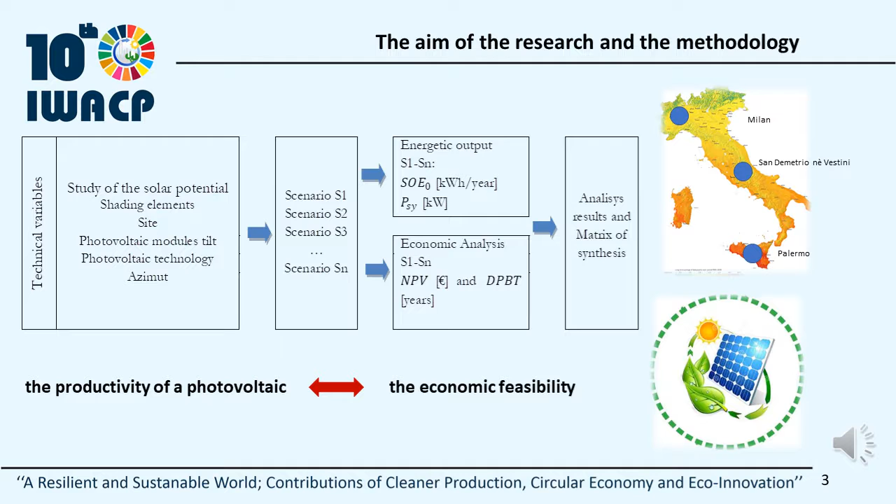To this end, the researcher has developed a methodology tested on a case study which is based on technical and economic criteria. To analyze the productivity of the photovoltaic system, all the main input factors that can affect the technical and economic performance of the system were investigated: in particular, solar potential analysis, individuation of shading elements, place of installation, azimuth, tilt of photovoltaic modules, and photovoltaic technologies. For the economic valuations, the discounted cash flow method was used; in particular, the two indicators of net present value and discounted payback period were estimated.

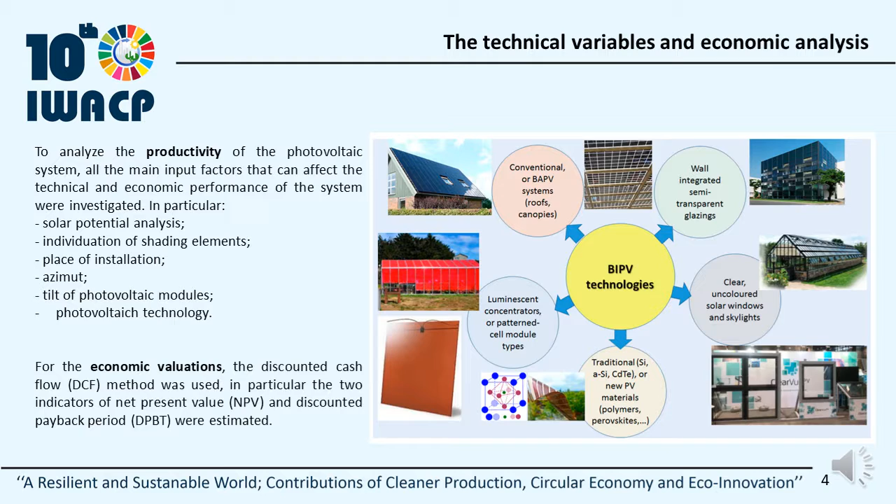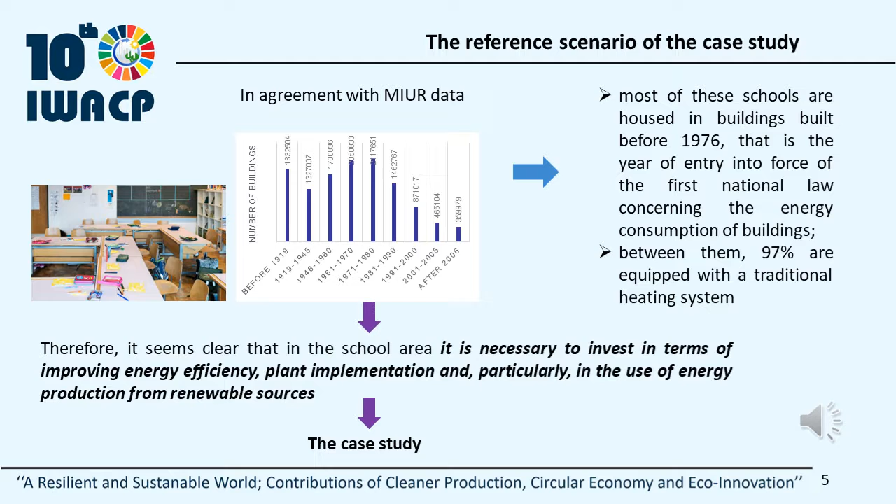The reference scenario of the case study is that of the school because, according to MIUR data, most schools are housed in buildings built before 1976, the year of entry into force of the first national law concerning the energy consumption of buildings. Among them, 97% are equipped with a traditional heating system. Therefore, it seems clear that in the school area it is necessary to invest in improving energy efficiency, plant implementation, and particularly in the use of energy production from renewable sources.

The San Demetrio ne' Vestini Comprehensive Institute is located in the municipality of San Demetrio ne' Vestini in the province of L'Aquila and includes kindergarten, primary and secondary school. The latter is housed in an isolated building organized according to an L-shaped floor plan. It is spread over 3 floors which are completely above ground thanks to the presence of the steep terrain in the south elevation and partially underground in the north elevation.

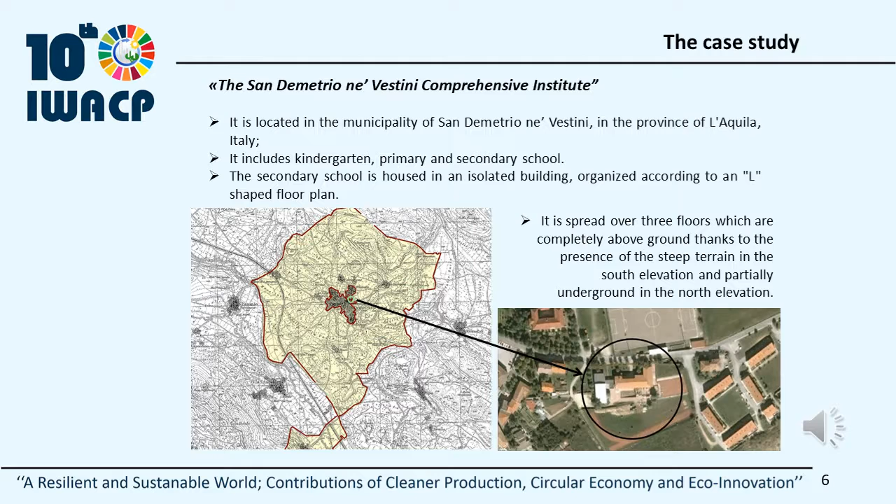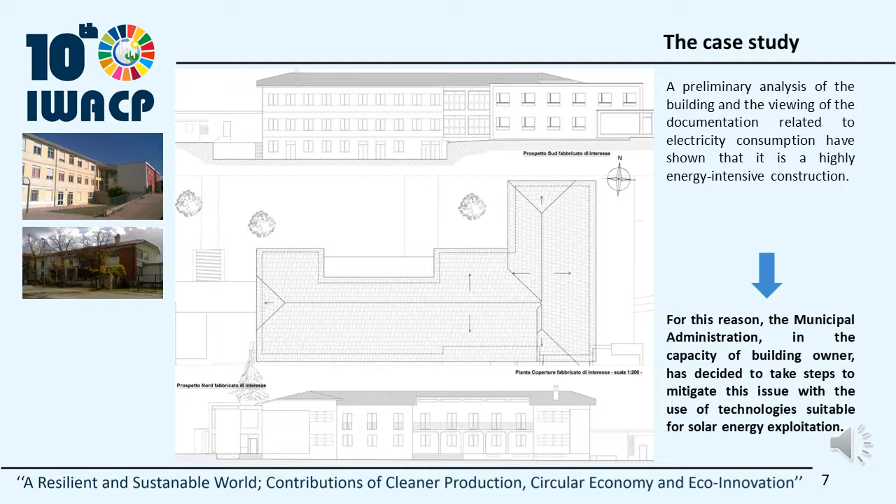The preliminary analysis of the building and the viewing of the documentation related to electricity consumption have shown that it is a highly energy-intensive construction. For this reason, the municipal administration, in the capacity of building owner, has decided to take steps to mitigate this issue with the use of technologies suitable for solar energy exploitation.

Related to the input data, the PV system was defined as a function of geographical position of the plant: north, central, and south of Italy; plant technology used: monocrystalline, polycrystalline, and thin film; roof inclination: 15 degrees, 30 degrees, 45 degrees. Considering all the possible combinations of these parameters, it was possible to obtain 27 different scenarios, obtaining a wide range of solutions to evaluate the variation of the photovoltaic producibility for the most commonly used technologies.

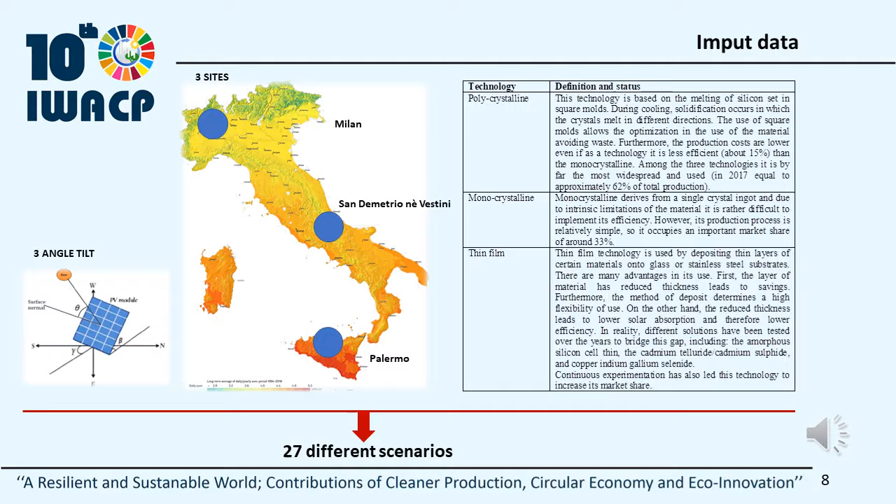The results obtained show how the profitability of the PV system is verified in 21 out of 27 cases. The greatest profitability is obtained in the case of southern Italy, with a monocrystalline technology and an inclination angle of 30 degrees. Furthermore, any case study located in southern Italy has greater profitability than the respective case studies located in northern and central Italy. This is because the PV plant located in southern Italy has greater efficiency and therefore greater system output energy.

However, even in the case study located in southern Italy with thin film technology, the profitability of the plant is not high and the negative cash flows are repaid by positive cash flows at the end of the life of the plant, 20 years. For the other case studies located in northern and central Italy with the thin film technology, the PV plant will give an economic loss. For the remaining technologies, the value of the NPV is always greater than zero. They are therefore profitable investments.

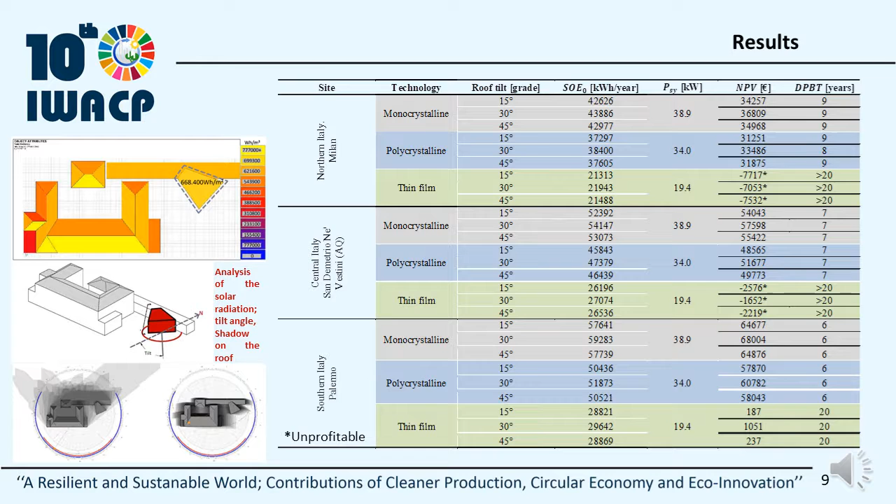This is also confirmed by the DPBT index. In fact, the time required to recover the investment is a maximum of 9 years. However, leaving only the technology to vary, monocrystalline technology leads to greater economic profitability despite having a higher investment cost. Finally, with the same technology used and the location of the system, an inclination angle of 30 degrees allows greater economic profitability. This is due exclusively to technical choices that allow the plant output to be maximized. We also made a comparison without FER 1, and we have seen that in most cases the investment is not profitable.

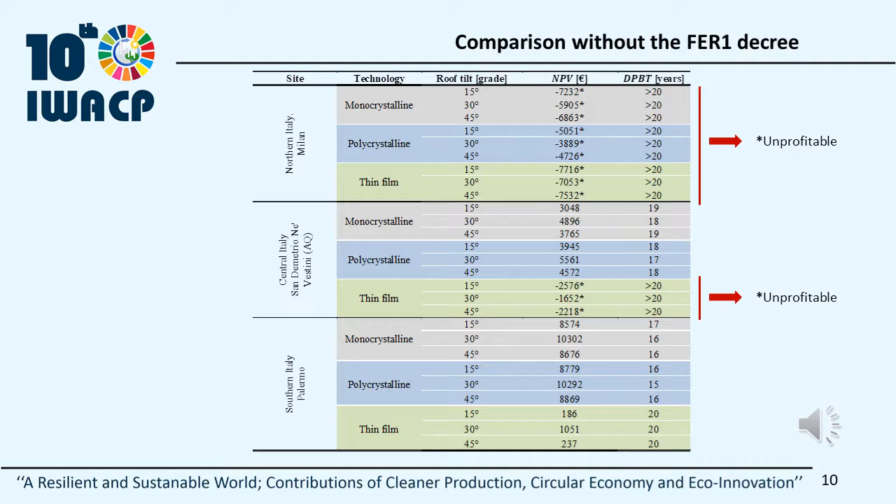So we can conclude that the research illustrated has shown that the FER 1 decree is suitable for encouraging photovoltaics, especially in the southern regions. It would be desirable that in the northern regions it was more used to encourage other technologies. The methodology developed could be used to optimize the process of exploiting renewable energy for better energy performance. The methodology could be easily replicated in other existing public buildings in different locations. The approach also could easily support the decision-making process of designers and administrators to make the energy upgrading choices for the promotion of renewable sources.